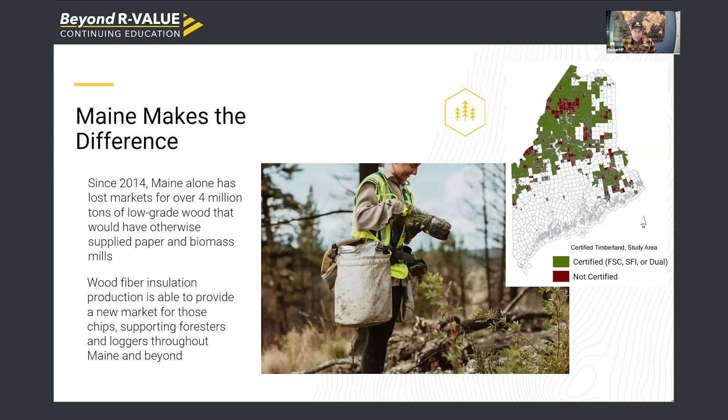I am going to actually get started though with a little presentation just about TimberHP. The first part is where we're sourcing our materials. We're based up in the state of Maine. We're taking wood chips from FSC and SFI certified forests, meaning the forests that we're actually pulling the wood chips from are sustainably harvested. I think Randy Rand probably lives the closest out of anybody on here to these, but that's just something pretty neat. All we're doing, we're taking those chips, the waste chips from the lumber mill industry.

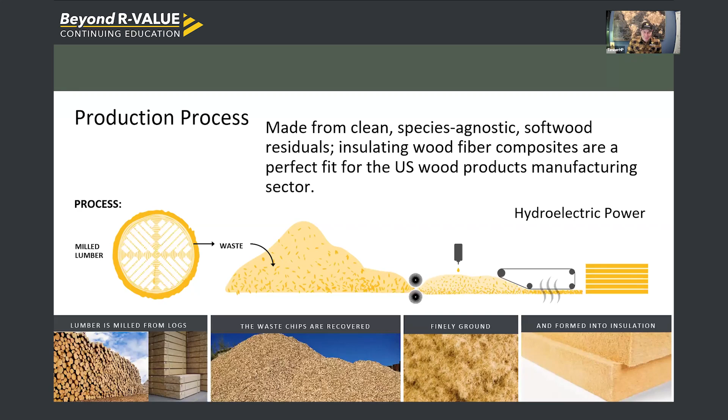We're basically steaming them, shredding them, adding a liquid boric acid, and that creates our timber fill product, our blow-in product, then our TimberBatt. And then we also will have a timber board product. I know Dan Hines is very excited about that product, I think he calls me about once a day asking when it's going to be available. So it will be soon, we're saying June or July at this time.

So it's now November. So when we start looking at the carbon and embodied carbon - and guys, feel free to chime in too during these, because I know you guys also do a lot with carbon - I'm not sure how much is in the presentation, but basically, insulation is a big area where we could really reduce carbon that we're putting into our buildings.

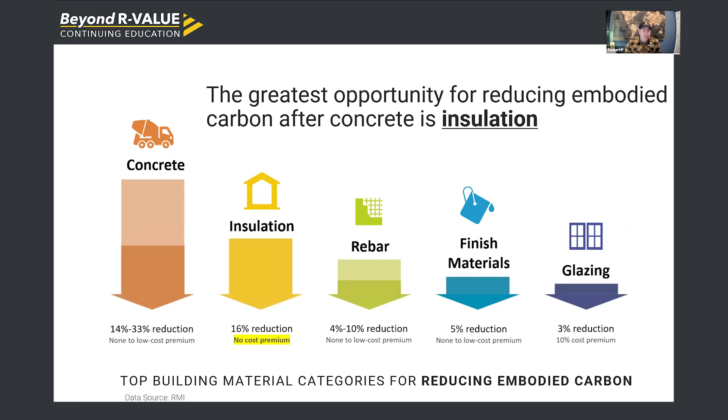Concrete, number one, there are ways to reduce the amount of concrete in a build, but insulation, really without much of a cost premium, is also a great way to reduce that carbon. When we start looking at different products, you can see the wood fiber was negative carbon, and then when you get into the foams, it's going to be much higher.

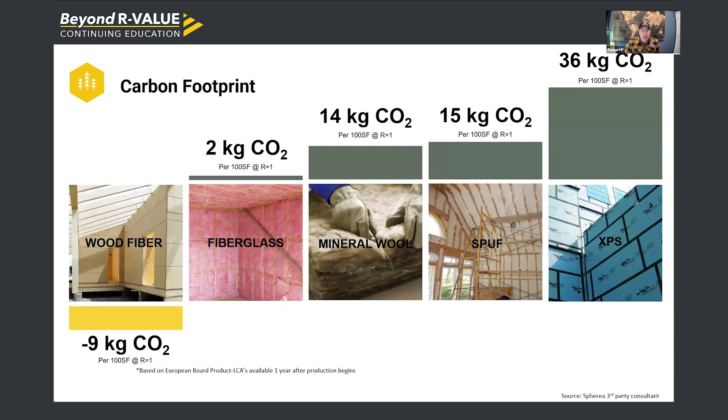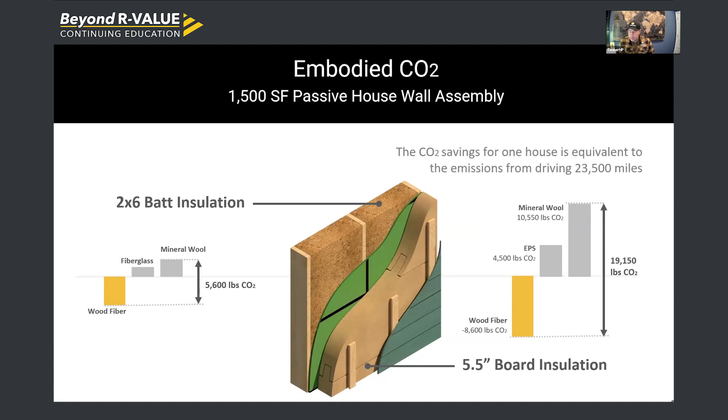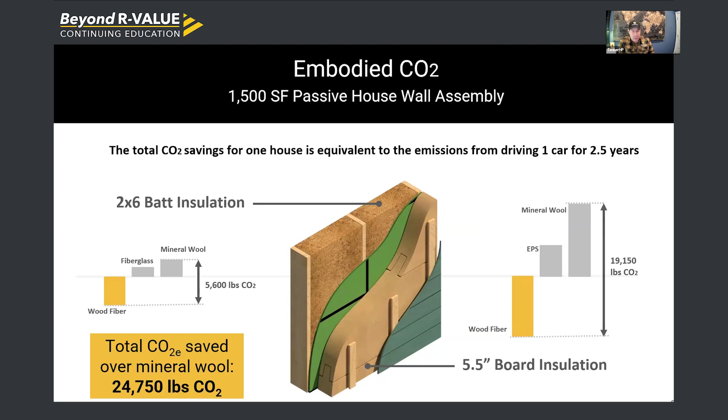I'm going to go to the end here, but basically if we look at a passive house wall, we could save a lot of carbon. This is showcasing that by using wood fiber insulation, you're basically able to take a car off the road for 2.5 years based on the carbon, which is a really nice benefit.

And then, Chris, I wanted to pass it over to you to talk about what you're building now in your world.

We're building a house that's going to float up into the sky. This is a little weather balloon right here, that when the owners want to just go for a little ride, they'll take off.

This is a new construction home in Atlanta. We are going to be certifying it passive house, the 2024 criteria. It's about a 4-bedroom in a historic area of Atlanta, so we're going for a craftsman style to fit within the context of the neighborhood, and it's pulling out all the stops.

We're doing continuous insulation on the exterior, and then we're going to use a blown-in product, most likely in the cavities - all the cavities - and in the attic and on the roof line.

I'm going to button this up real tight. We're in the South, so we're able to do this without triple pane glazing, but we'll get into some of that when we get into the details of this project and the process. A lot of this is, it looks like you can have a normal looking house and still have it be passive. Nothing has to be tricky about it, but there it is.

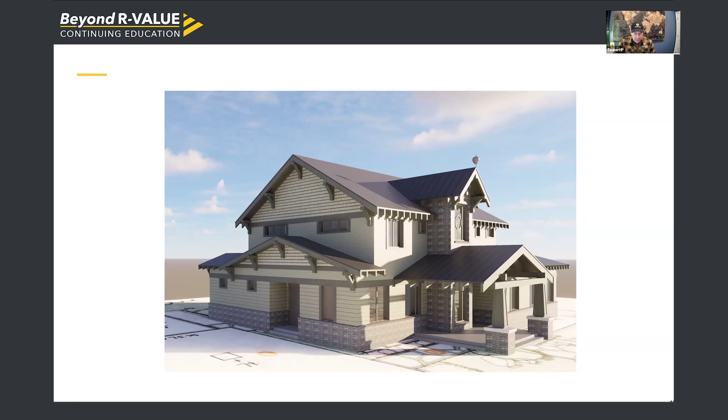There you go. And we can see your screen, Randy. All right, well, I can't - hang on, there we go.

So I think the first thing we always start with is just what is passive house. Thinking very simply, and trying to get it out there to everybody, it's a set of design standards, and then we've developed methods for building. So it's like a building code, but it's a design standard and methods for building, where the ultimate goal is interior comfort, health, and predictability of how that building is going to operate. And who doesn't want to have a comfortable home or place to be in all the time?

So those are the main things, and I think it's always been one of those things that's hard to add value to when you start talking about some of this stuff. So it is a hard sell sometimes. But those standards...

And the certification process is done with two different agencies here in the US. There's the original German-based Passive House Institute, and then the US-based PHIUS, Passive House Institute US. Both organizations also have certifications for new builds plus for retrofit. So if we're looking at doing a retrofit, you still can modify that house to meet Passive House standards. So that's kind of cool.

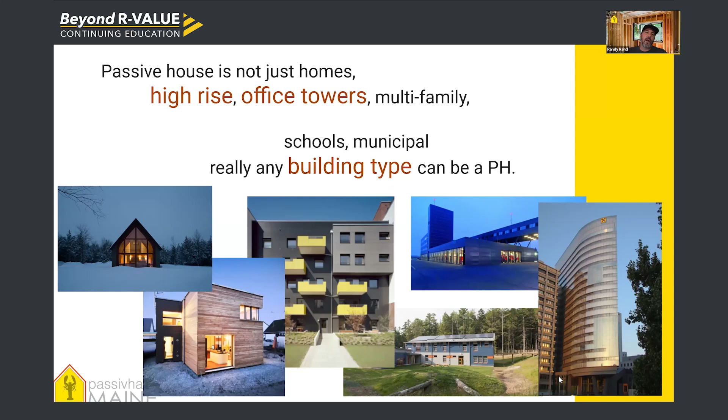So what are the standards or targets we're trying to meet with Passive House? It sets forth a couple design standards we're trying to hit. One being thermal energy demand - the total heating and cooling load required to keep that building space conditioned to the comfort level set forth. Then also total energy demand, so overall the plug loads in the building and all that. And the other big one is air tightness.

Air tightness tends to be one we talk about quite frequently, because no matter what climate zone we're in or what we're trying to design with different wall assemblies, the air tightness standard is the same everywhere, and everybody's trying to detail things out to that extra effort.

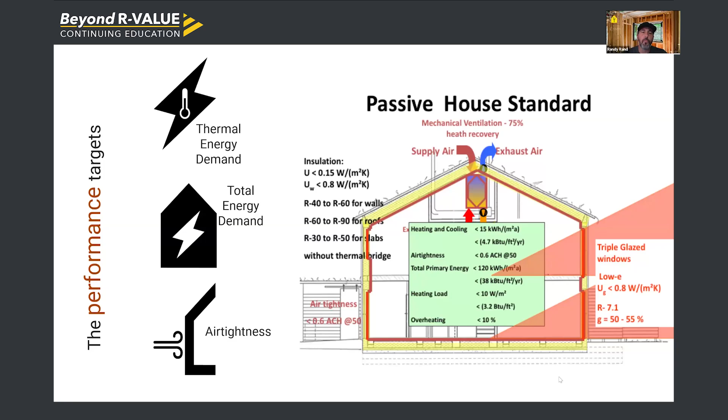But what do we look at when meeting those standards as we begin our design? Things like continuous insulation are very important, reducing those thermal bridges from the exterior to the interior spaces by covering those studs up in the walls with continuous insulation. Eliminating thermal bridges is a big thing, very important, especially when we talk about moisture in walls and condensing surfaces and problem spots. Once we start controlling everything so much better, even the smallest thermal bridge could be a problem in the long run, so we look at those very, very closely.

Air tightness, high performance windows and doors really make a big difference. And then fresh air - mechanical ventilation is a requirement for all these passive houses, and it just increases the quality of our air inside, and saves energy.

So it's something that I think we're starting to see with code in our area, people starting to talk about it. But that's what's kind of cool, I think, about passive house. As we start talking about these things, they become a little bit more mainstream and they start trickling down into code-built homes and things like that. So everything from air tightness to mechanical ventilation is really starting to affect the industry wide.

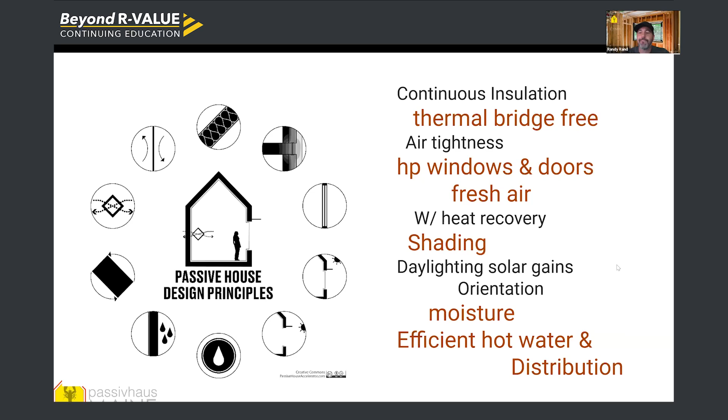No, we like our slabs here. I think it's just like any new design, new technology, anything that's being introduced. We're doing some things on our passive house here; we don't have a turn down on our slab, so we're building this raft slab, continuous 8 inches, and that's a new thing. People are getting to know it, and I think like anything, there is a future for it. But we've been building houses with 2x4s for how long? It's going to be a really long time before we go away from 2x4s, if we ever do.

Getting away from slabs, probably not ever going to happen. We can do that on a few projects here. On your project, it can be done. But will we ever go away from it? We've been doing it for so long. Until it becomes something like we cannot use concrete anymore, or some other extenuating circumstance that says we have to come up with something else, I think we're always going to see it. But it's another good idea. It introduces components that are in contact with the earth that have to be considered.

I think that's a great point, Chris. And for us at Habitat, I strive very hard, as we're doing these higher levels of efficiency, to not add complications that our homeowners don't totally see the return on. And I think the slabless foundation is a really great idea and works for some people.

And I think the question was whether or not TimberHP will have any products that are going to be able to come in contact with the ground coming out, and that'd be great if they did. I tend to not want to be the last adopter of something, but usually try not to be the first adopter either. And that may sound like passing the buck to some people, but mostly it's because I'm not building a house for myself. I'm usually building it for other people that are in need, and they're not going to be able to deal with things that are wrong.

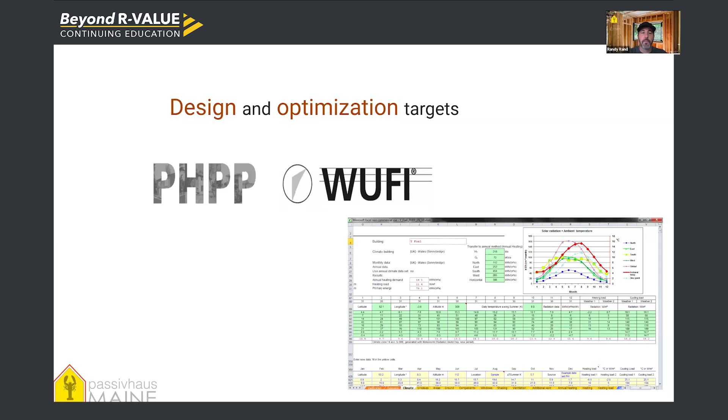But again, and we've all kind of hit on it, why do we do Passive House? It's because we're creating resilient buildings that are going to last much longer than other building types. They're going to be way more comfortable and just very healthy for both the building and the occupant, because we are thinking about all that stuff up front too. Then we also start thinking about those materials, the carbon impacts, the off-gassing of materials that we're selecting indoors and all that type of stuff.

But as a result of thinking of those three things, we really end up with an efficient and an affordable home to operate. So those are, in my opinion, the byproducts of building Passive House: getting an efficient and affordable home. But the main goal is to build resiliency into our buildings and that comfort and health, which those three things are hard to put a value to, right? Or associate some sort of money to when you're building and what those things could cost.

But so, and yeah, value is the key word. I'm sorry, I was just going to say value is the key word there, Randy. Obviously, like anything, everybody's asking about cost. Is there savings? PHIUS has done a study and said that this is actually only a tiny percentage more than standard construction. Many people disagree with that. It all depends on the project and how you approach it.

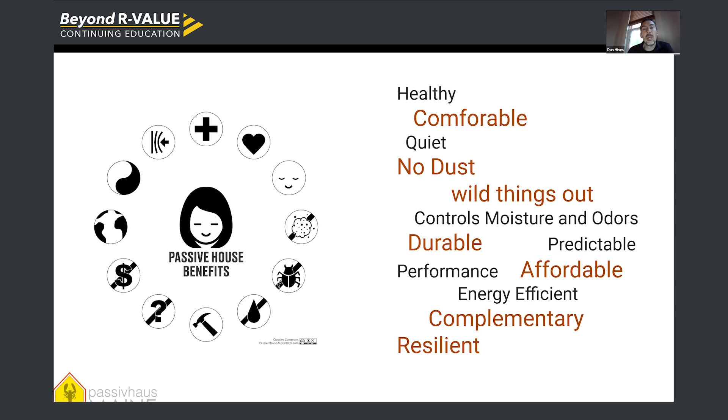Now, the nice part about Habitat is most of the people on our job site on a given day aren't billable hours. So it's really just me and a couple of people who have salary. So it took us a lot longer. And our push since then has been to weed out the things that were not needed. There were lots of different design aspects of that first one, because the reason we got into it was the Solar Decathlon. A university came to us and said, we're designing this, we'd like to actually build it for someone. Great plan.

So they designed it, really out there thinking good building practices, but it was pretty complicated. So the next 6 we did, we scaled that back and we made them look much more like our normal townhouses, more standard details like what we did before. But they were the first time that we were really in the design as much. And so we kind of pushed it and did belt and suspenders on everything. And that was great, but again, it had extra costs.

And so the next 17 that we're designing right now, my goal was to be able to do a real apples to apples comparison of this is what it will take us to do. And the PHIUS criteria has honestly changed over that 12 to 14 years now. They've made it a little bit more climate specific. There's a prescriptive path now. There's things that can make it a little bit easier for you to dial in your costs. For a lot of passive house builders out there, they're building for a different client each time. So they might be able to standardize their wall type or some details, but they're going to have a different house all the time.

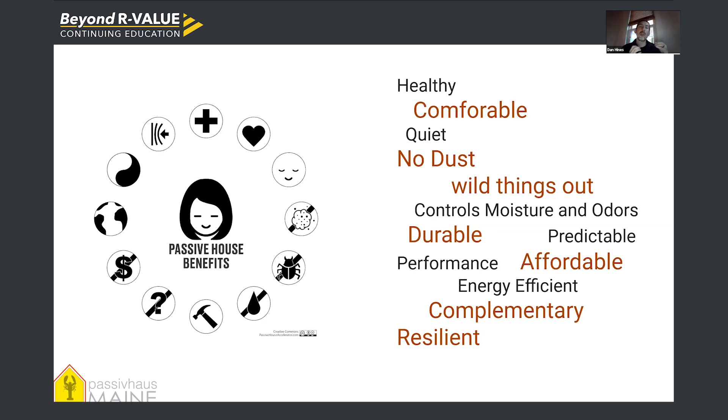Most of the other green building standards that we do, it's just a checklist, and they're good. They help you build a better house, but it's beholden on you to make sure that you do that design up front. Whereas one of the great things about the PHIUS and PHI program is they want to help you. They are going to look at your designs. They're going to critique them. They're going to give their expertise, because if they're going to stamp it and approve it, they want it to be a successful home and successful build as well.

And so getting that forethought and getting knowledgeable people's eyes on it before you ever step foot on the site, I think is really one of the major benefits. That's the one thing that we preach in a lot of our trainings is just pre-planning. Even with the code built home, that pre-planning and understanding where all your control layers are and how they're making their connections, because that really makes the difference.

And then I think you kind of touched on it too, but repetition. We've been building houses forever one way, and we're quick at it because it's repetition. So until more people are doing this and they're doing it repetitively, then it will also gain some additional advantages, I think, in cost.

I know the first house that we ever did definitely took way longer to detail out than they do now. Now it's just second nature. We don't think about those details. They just happen. So I think that's kind of cool. Awesome.

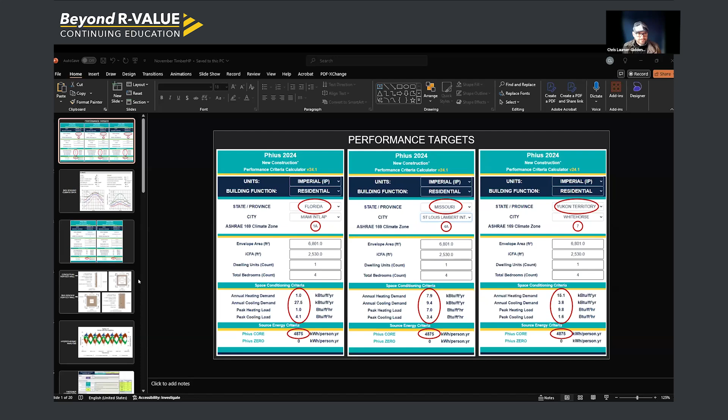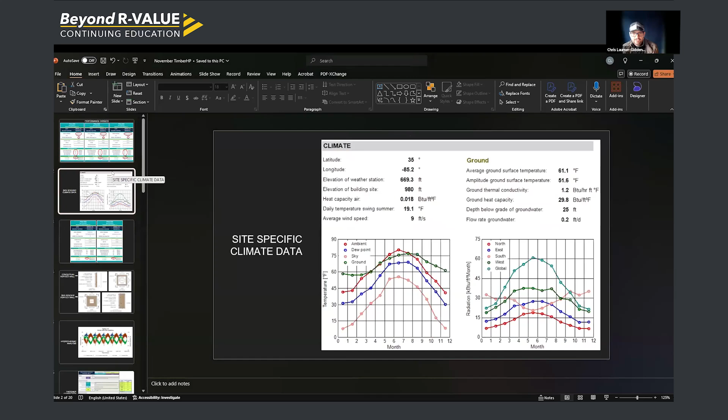So the criteria, what we're trying to get is climate data. That's another thing we have to enter into the software, to let us know what our climate data is, based on an average of usually 30 years. This is typical climate data.

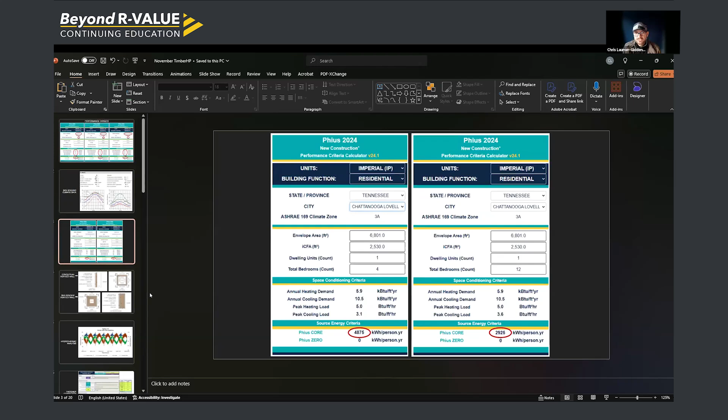So you enter these targets into the software, and then those are your guiding factors. Once you have these factors, you design your building envelope based on trying to meet that. You have good air sealing, good thermal control layer. You get all your moisture, your water, air, and vapor control layers.

Designing your whole assembly - this is sort of conceptual, where you have all your control layers to the outside of the structure. And here is a site-specific one. This is the Chattanooga project we're working on. We did both cavity and exterior insulation. But the ultimate goal here is to make sure that this perfect wall is continued around the entire structure.

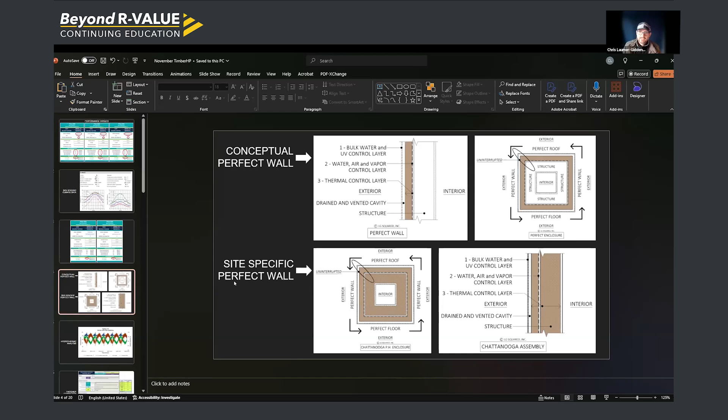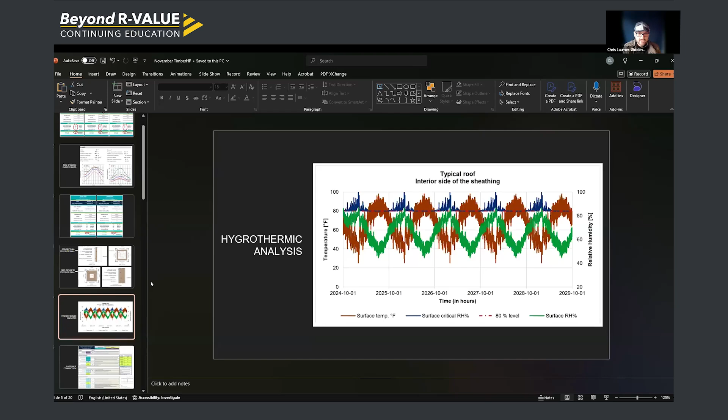So once you have your building envelope, you look at hygrothermic analyses, which tells us what's the moisture risk of these assemblies, these perfect walls, to make sure we don't put our assemblies at risk. This is something that PHIUS will ask you to do if they don't have full confidence that one of your assemblies is going to fare well in that weather, in that climate. Maybe too much exterior or not enough exterior insulation and too much interior. If you have the wrong balance, you're going to get condensation in the assembly that will cause damage.

Other things we have to consider - if you use continuous insulation over a certain thickness and you have metal furring strips or hat channels or something that is in contact with your metal fasteners, you have to account for every single one of those fasteners. So this is a calculator that helps us know how much we have to reduce the R value of the assembly for all of the walls, the roof, wherever we have these fasteners. I'm only sharing this as an example of some of the nitpicky stuff that we look at, everything.

So that's another factor, but it reduces that thermal bridge, or that heat loss, tremendously. And then those are really the 2 main options that are commercially available.

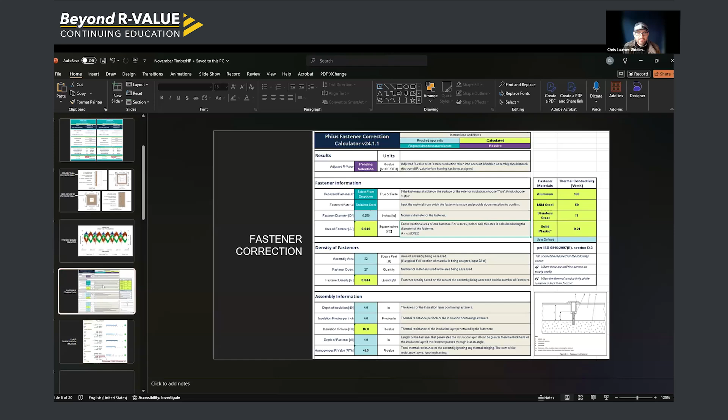So these are the targets. This is... go ahead, one more quick thing.

Talking about limiting screws too, Randy actually had it run through an engineer, I believe, right Randy, on like how many screws per, vertically on a furring strip, and even angling some of the screws up to hold. That's right, so then you're not just zapping in a bunch of screws too. Depends on the cladding, depends on the whole, whatever - like if you're doing super heavy cladding, then there are screw patterns and all that matters.

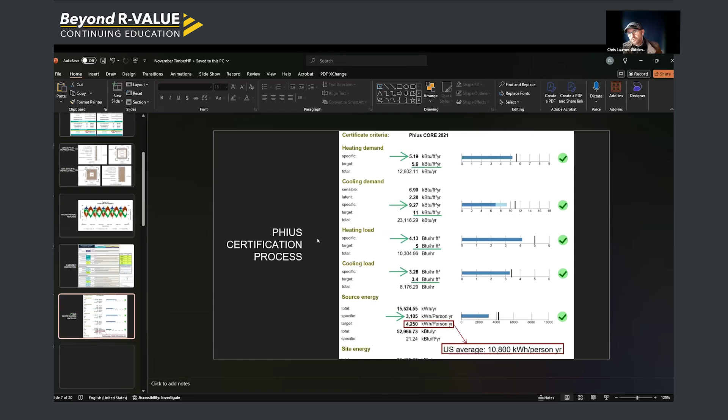So basically you've built the model. So much else goes into this, but I want to give just a quick overview. Here are your targets - this is the target, underlined, and then this is the specific one, which is to the project. So this gives us an idea - we're using 1,000 kilowatt hours per person less than the target. You can see all the check marks here, that's a good thing.

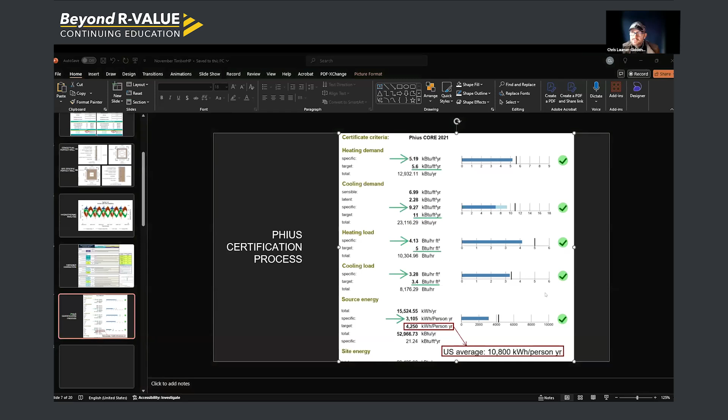Let me just jump over and stop, and I'll just show you the software really quick because there's some interesting things there. I just want to show this, speaking of air tightness. So this is what our WUFI Passive software looks like. This is the Chattanooga project. Right here we have 0.05 CFM per square foot for air tightness, and that's basically about 0.5, 0.6 ACH50.

If we double that to make it 1.2 ACH50, everything - we're failing just like that. So this air tightness criteria is extremely important. We've gotten our houses down to 0.05 ACH50, so we tend to use a lower target, and you can see even between 0.03 and 0.05, there's a significant jump there. So these are tiny little things.

I would add, in talking about cost, that's the other thing - airtight tapes and things like that cost money. So what I'm saying is, not 100%, but essentially airtightness is free. It's attention to detail, planning, and doing things the correct fashion. Because since we built passive houses, our non-passive houses are tighter too - because like we've been saying, if you get in a routine of doing things the right way, not passing that cantilever just out, fully wrapping your air barrier all the way around, and just the good practices to keep things airtight, that stuff is free.

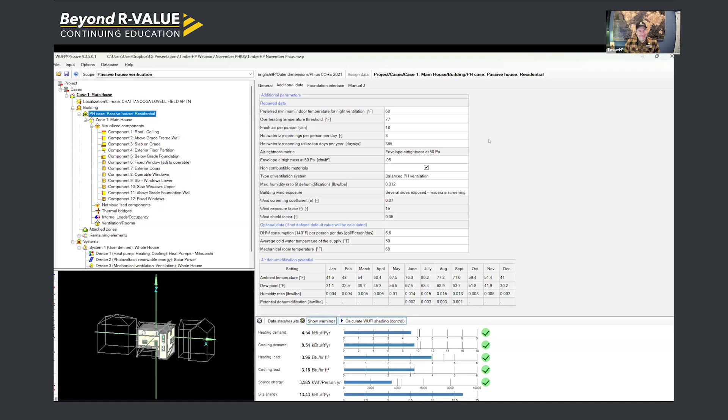I don't care about the insulation yet. Give me a super tight envelope and get the ventilation balanced. That gets you, as you can see with air tightness, a huge difference in the performance and comfort level of your building. So to your point, the most I've ever seen spent on a house is 1% of the construction budget to increase the air sealing package. And all they did was buy thousands of bottles of caulk. At the time, that's about all that was available, so they just went around the entire building and air sealed every single gap. Never smelled or seen more caulk in my life, and I don't want to ever again.

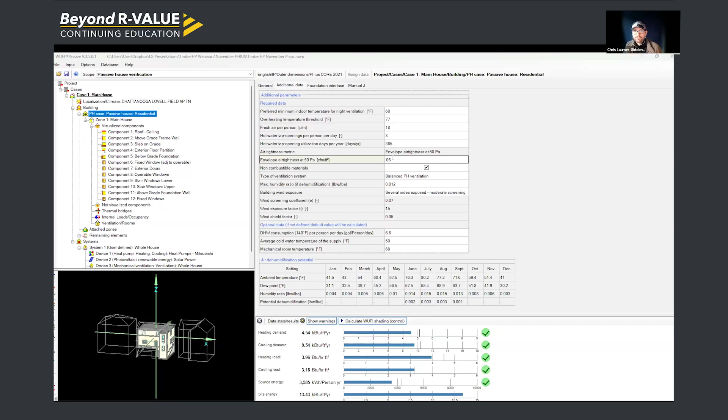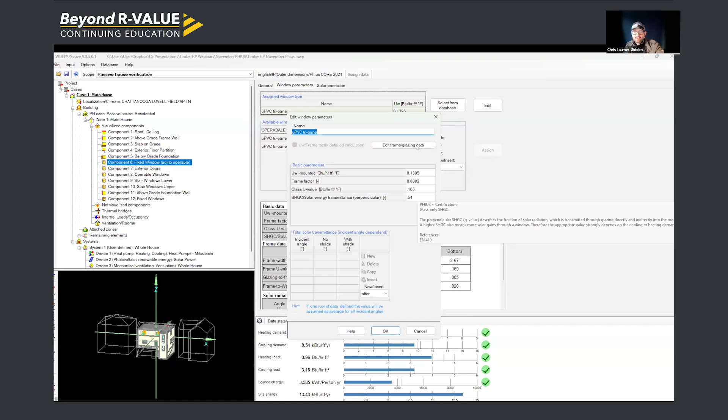So anyway, the windows, like I said, we're entering all this data from the frame, the glass U-values, the solar heat gain. These are just the U-value of the frame, the U-value of the glass, every little bit, and how the glass meets the frame. So all that stuff is crazy.

One last thing that's interesting here - of course we're calculating all the water heating. One cool thing about this project is it gives us an idea of how much solar we might need to get to zero, and it's usually pretty accurate. So it's somewhere around 9,700 or something. Anyway, you enter the kilowatt size of the photovoltaic system here, and when this equals out to zero down here, site energy and source energy, that tells you how much. Basically, you can tell your solar contractor, okay, we're going to target about this, or for budgeting purposes you don't have to get them involved yet.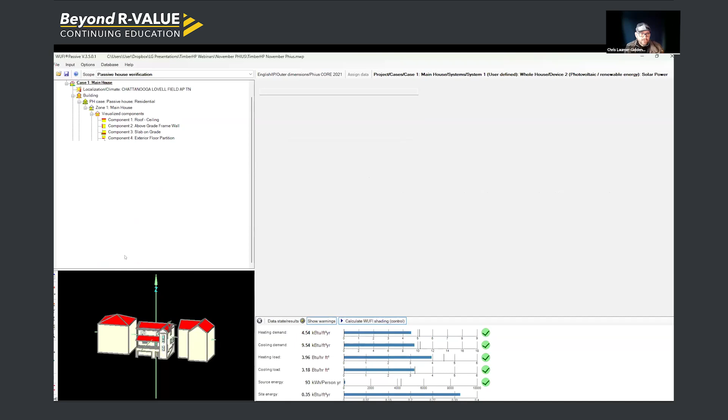So that's just another cool thing, but there's so much detail in this, it's just hard to go into it all. But everything we do matters. What I learned here is to hire a passive house consultant like yourself if you want to go down this path.

Yeah, that's right. And we've been using this software since before we were certified consultants, because passive building is where passive house came from - you're building passive, and that's just making these buildings resilient, kind of doing their own work to save energy and to make you comfortable and healthy. So this passive building idea doesn't have to meet the certification. If you got halfway to certification, you've got a rock star building. So passive is really the goal.

Passive house is awesome and fun and gives us a measuring stick, but we can do everything you do in certification without getting the certification, which can cost $10,000 to $20,000 more just for the certification part. I saw somebody asked about pretty good house versus passive house, and I think, knowing Emily and Mike, some of it's burned out from wanting to build really good, but not every client can afford the thousands of dollars. Certification matters though, having those extra sets of eyes, especially the first time you're doing high efficiency or anything like that - going through a program has really big benefits.